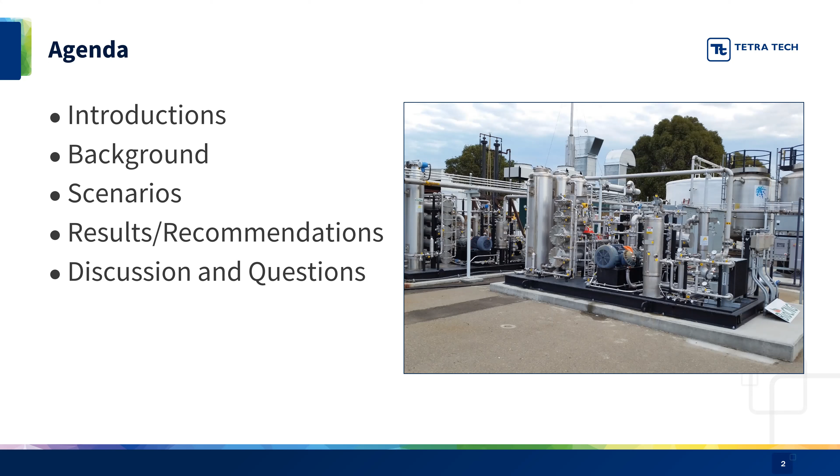We selected several scenarios to analyze. So we'll go through each of those scenarios and kind of a very high overview of the technology and what would be associated with each of those. We have a section on the results and recommendations, which I'm sure is what everyone's excited to see. And then lastly, we'll leave time for discussion and questions.

So for introductions, I'll go first because I'm still talking. My name is Lee Daigle. I'm a client manager with Tetra Tech. And I've heard Cornerstone and Tetra Tech, just so everyone knows. Cornerstone is a subsidiary of Tetra Tech, so we just go by Tetra Tech. So you'll see that all over the place. Mark was one of the original members of Cornerstone. I joined Cornerstone 6 years ago also. I've been in the industry for 20 years. I actually was a project manager for Dane County's RNG facility. And I'm involved in the industry all over the place and teaching classes also.

Mark? So Mark Torzani, I got my career starting in this business over at a place some of you might know, Donohue over in Sheboygan, and worked over there a long time. Started working on landfill gas projects, landfill gas to energy, as an intern. So I've been working on biogas projects through most of my career, and I always liked specializing in, what can we do with this gas? How do we put it to beneficial use?

So I've been involved in that, and that includes 16 years, which is hard to believe, on renewable natural gas and biogas, landfill gas as a vehicle fuel. And one of those things I'm proud of is having a patent on the Bio CNG system and being listed as one of the inventors on that.

So I'm a member of the SWAN Board here in Wisconsin, and I've taught a number of classes through the years. So I'm just thrilled to be part of this here. I'm from Wisconsin, Wausau originally, and always like giving back.

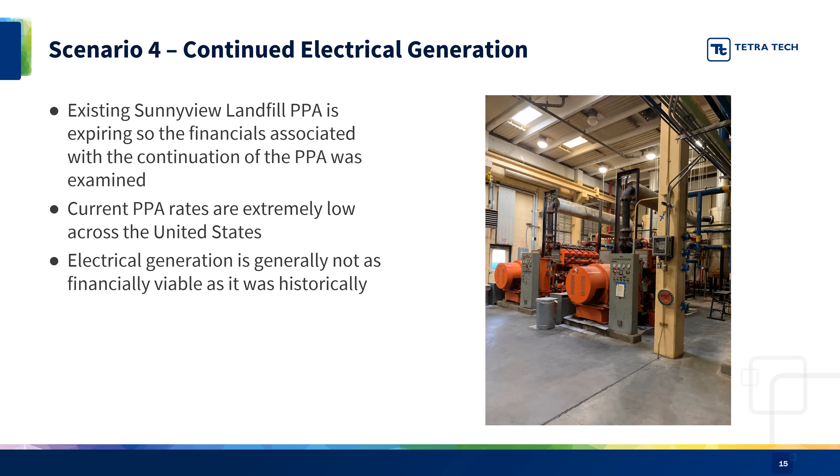Okay. All right, thanks, Mark. So I'm going to run through the results, and then Mark and I will both get into the recommendations after we go through those, and we'll go individually scenario by scenario.

So the first scenario, this is the RNG generation with a direct use, a direct injection. The 10-year net present value of this is $19.6 million with a 3.5-year payback. So the payback is extremely good on this, with an internal rate of return of 27.6. And this is all in the report, by the way. If you have a copy of the report, you don't need to write down these numbers. It's all in the last pages.

But in summary on this direct injection, yes, it has an extremely fast payback period, but it also has the highest capital cost associated with any of the projects at $16.9 million. That does include, I believe, a $4 million interconnection. And that is based on Mark and I, we went through this a few years ago with Dane County. We just did it recently with Marathon County, where we're looking at injection points and what it's going to cost.

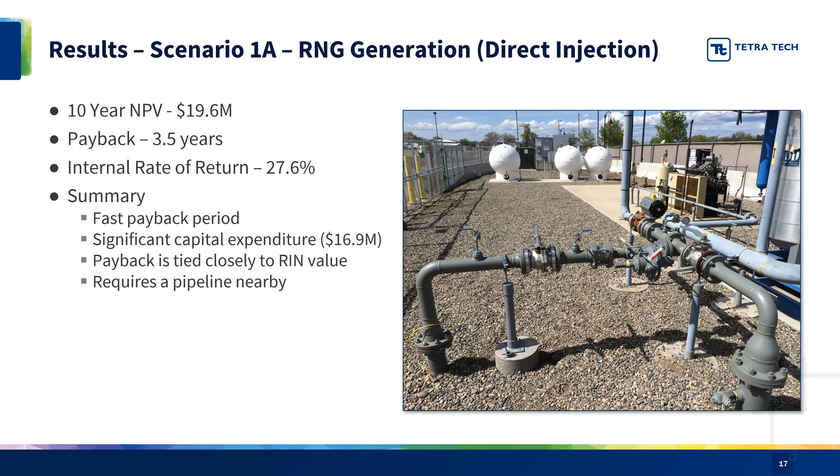This does require a pipeline nearby, but based on a preliminary examination, you do have pipelines sufficiently close, and they should be able to be tied into. But the next step is talking with ANR, talking with TransCanada to really get some of the information about those pipelines. Just because there's a pipeline nearby, it may be at seasonal capacity, and you may not be able to tie into it. So the next step, if this is proceeded with, is to get in contact with TransCanada right away and start talking about the interconnection.

Scenario 1B, which is the RNG generation with a virtual pipeline. Again, it's a lower 10-year net present value with a slightly longer payback period. It is still a fast payback period. I mean, under 5 years for paying back $15 million is outstanding. However, again, this is tied to that RIN market. So if the RIN market fluctuates, you aren't going to get that same return on your investment.

The additional cost that you're going to have on this type of project: first off, the operations goes up quite significantly. It's about $1 million more a year in your operational cost, because now you're hauling the RNG back and forth between your site and an interconnection point. So your operations increases. You also will still potentially, depending on scenario, have a cost for an interconnection and an offload station at another facility.

As of right now, Mark and I are aware of 2 offload stations in the state of Wisconsin. One is Dane County, which was the first in the country actually to do this sort of a system, where they have an offload station on site to accept anybody's gas. The other one that we're aware of is a dairy with digester gas. However, from our information, the dairy is not a public interconnection offload station. It is private, meant only for partners within that dairy. So there is potentially the need to examine another offload station or look at using Dane County's offload station. But we'll get into that when we go into the discussion section of this.

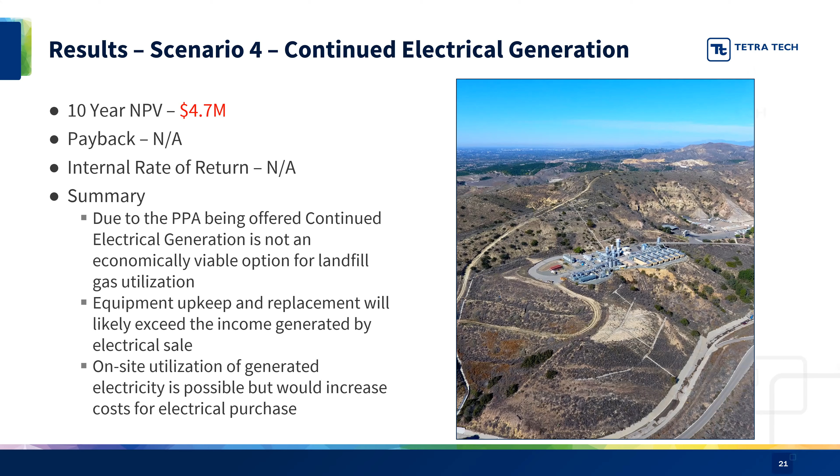So the discussion section, we're going to cover this real fast, but then we want to open this up for questions and really just kind of flesh out the next steps here. But in general, and this is worded in a particular way, Sunnyview has limited potential for a utilization project as you have this declining landfill gas generation rate. And that really hurts a long-term project, which is one of the key factors of the RNG, for example. You don't want declining gas generation because there's so much uncertainty in the RIN market.

In regards to the next step, Mark and I talked about this yesterday. We said, well, the next step is, do you want to proceed forward? You, as the board, need to make the decision if this is something still feasible. I have lots of clients who have closed landfills who are shuttering their landfill gas electrical projects down and flaring the gas because the payback isn't there. You can save costs, you can have avoided maintenance, you can save yourself a lot of headache with just shutting down the plants.

That is a realistic option here if the county decides to go that way. But if you say, no, we want to be green, we want to proceed with some sort of a utilization project, then it really is updating that economic pro forma based on that most recent PPA and really refining that electrical generation site information. You have one engine that needs this much work on it. You have another one that needs this much.

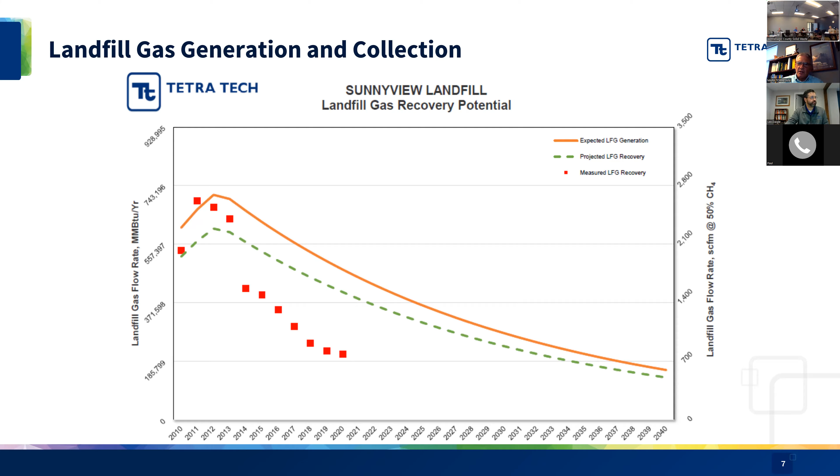Lee, can you go to the slide that had the RNG direct injection option with the chart on the right? It'll explain one thing on a closed landfill that's not active. This one? Yes. So we do work on wastewater treatment digesters, ag digesters, food digesters, and landfills. Landfills are the most difficult to put an RNG processing system on, and I'll tell you why. So we take our biogas source and we go through a pre-treatment. We're pressurizing it. We're taking out some moisture. There may be some VOC removal in there, but then we'll go to the CO2 removal, CH4 enrichment.

If we're working on a digester, a wastewater treatment plant, we're done there. Then we go right off to our off-gas control pipeline. In a landfill, we have a fair amount of nitrogen and oxygen that comes in because we're under a vacuum and we're drawing the gas in. On a digester that's under positive pressure, it's not uncommon for us to see methane in 60 to 65%, where I'm guessing on your landfill, you're somewhere in that 50%, John. Right. Yeah, and that's not uncommon.

A big cost in treating landfill gas is this nitrogen removal and the oxygen removal, which adds to your O&M, which makes it more difficult. And when you would say, hey, we got 700 CFM, 800 CFM on a closed site, it's not going to be high on a developer's priority list because they're going to spend their money on more active sites. It's not that it can't be done, but they're certainly looking for the largest return on their money. And that's where developers are going to go.

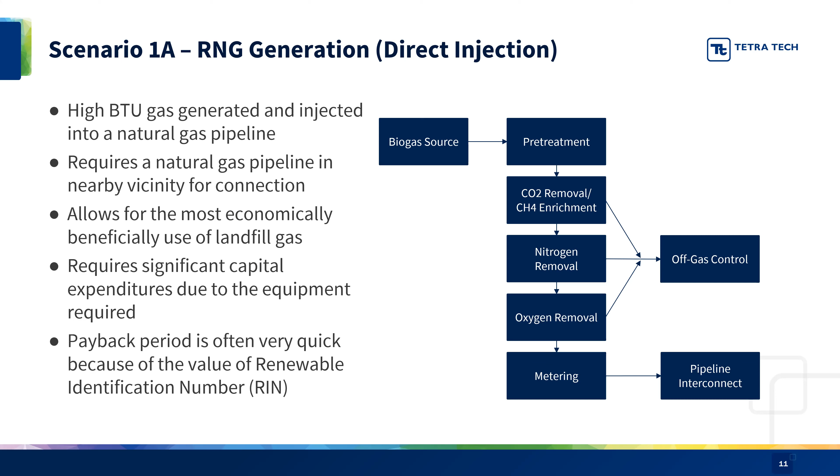The question would be how much. No, you're the chairman, you go first. Thank you. How much does it cost to convert those diesel vehicles to this type of fuel?

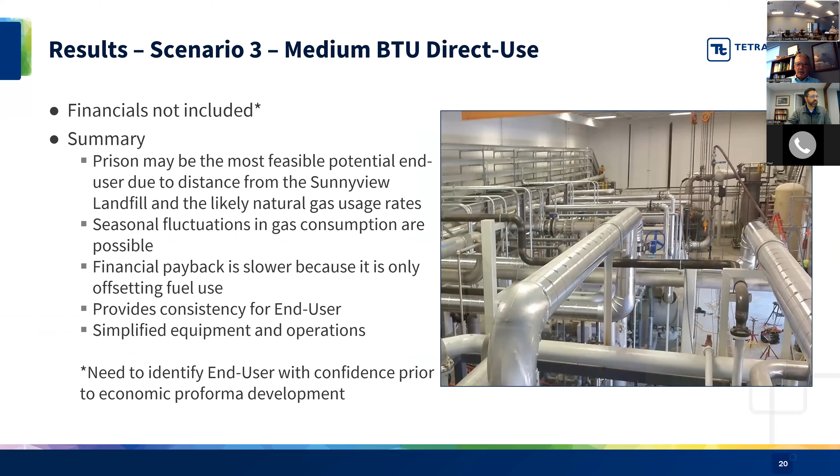We'll tell you what's going on in the market. Early on, we were seeing some conversions, and the large companies, Waste Management, Advanced, GFL, Republic, were looking at converting. Typically right now, because vehicles get replaced every 5 to 10 years, they're just buying new vehicles. And I think at that time, converting vehicles was going to be somewhere in that $50,000 range for a large engine. A large part of that is actually those compressed natural gas storage tanks.

So we're really not seeing gasoline or diesel engines being converted anymore. I think that market has fallen by the wayside and it's just strictly new vehicles. They're going to perform much better. And as I said, enough people have been doing this now for 5 to 10 years. They're just moving their vehicles around to make sure CNG vehicles are where they put their stations.

Back in the 70s, I was in the valley. I had an LP-driven Ford pickup truck, one of the first ones around. The thing ran extremely efficiently.

You never had to worry about changing the oil. Yeah, that's what I said, lower maintenance. And we had a dual fuel vehicle when we started in this. I think it was a Ford F-250, could run on gasoline or renewable natural gas. And we did do some dynamometer testing on emissions and power.

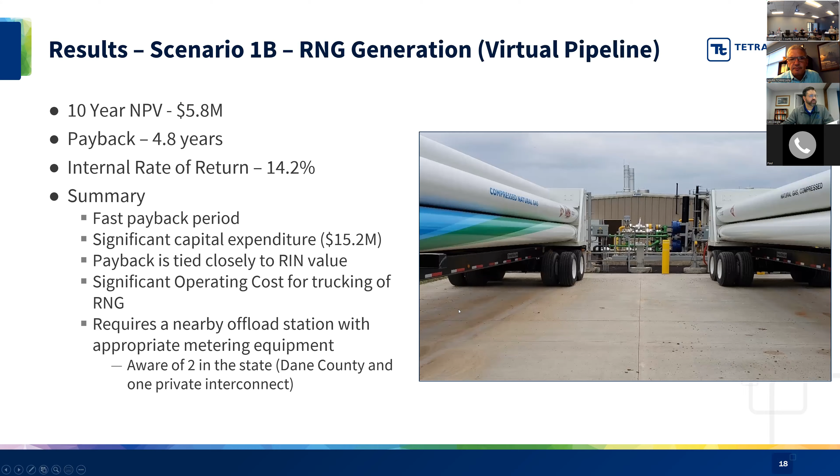And actually, Mark, I was just looking to see, yeah, so this is essentially what we're talking about here. It's a small slipstream of gas coming into a Bio CNG, which is just generating vehicle fuel. So it's this size. In the back here, you have your storage vessels, the horizontal ones. That's storing your compressed natural gas. This is your membrane, hydrogen sulfide treatment, the tank up front. That's a 200 CFM system, and that is the one I believe at Randolph Farms.

Yep. And actually, that concrete pad you see in the front there, right in the lower right corner, that was phase 1. We put concrete in there for phase 2 right away. Yep. You know, they were being proactive.

So, and this is true. Don't tell John, but that was right after the fire inspector left and said, here's what you have to do to use this. Some sort of sign or something was supposed to be on there. So we did it. A guy by the name of Mike DiMaggio was out there trying to do burnouts with the wheels. He got in the truck.

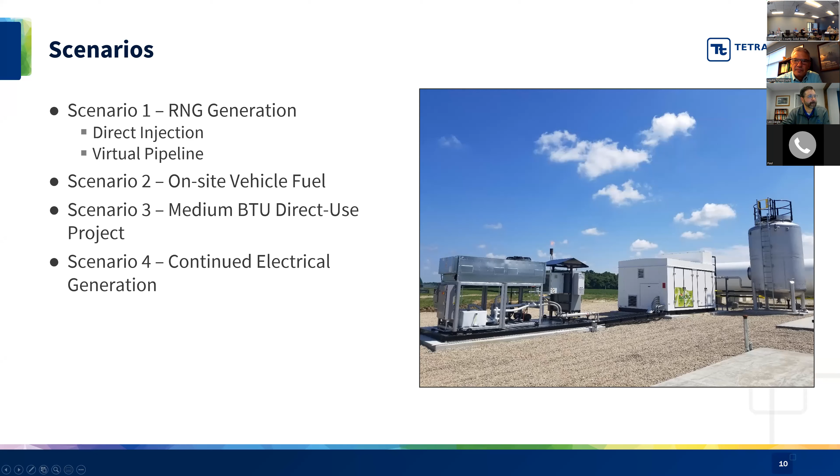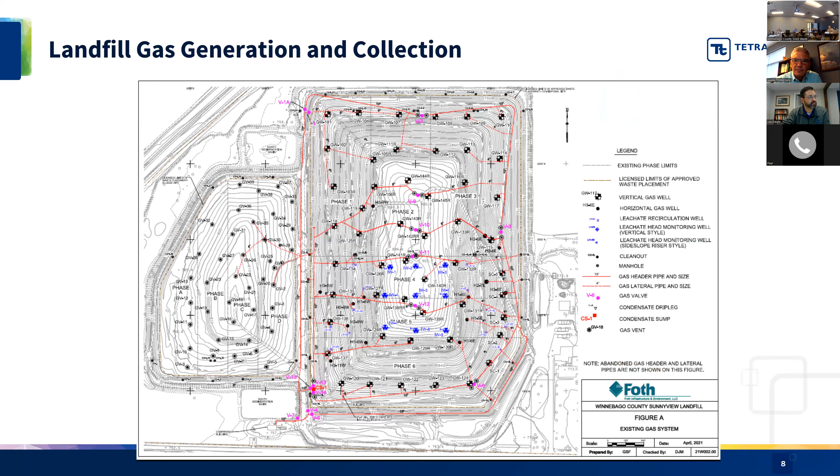Go ahead. You mentioned storing the compressed natural gas. Right now, the way I understand it, the hill produces X amount of gas. If we don't use it, it's flared off. How much can you store? I mean, on Saturdays and Sundays when none of the fleets are running, do we end up having to burn off the gas, or can a certain amount be stored?

We'll fill that with gas to about 250 PSI. It's a less expensive form of storage when we wanted to have some for weekends. The tanks that you see on the tube trailer and in the back are somewhere around 3,500 to 4,000 PSI. So if you're not using that fuel, and all of these systems are automated, once these are filled, essentially the gas then has to go to the flare because it has to go somewhere. You're not storing it in the landfill and we can't produce anymore.

So we try and size these systems so we've always got some sort of storage. It's a fine line between how much storage you need. It's expensive, and what's this trade-off with availability. There does get to be some usage of how many vehicles can fill at once, depending upon your flow rate. If you wanted to have the whole fleet come up and fill at once, you're going to need an awful lot of storage. That is something that is considered.

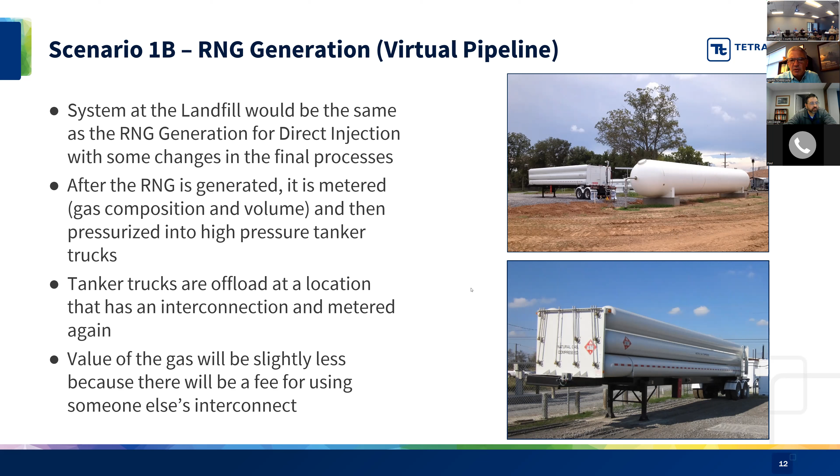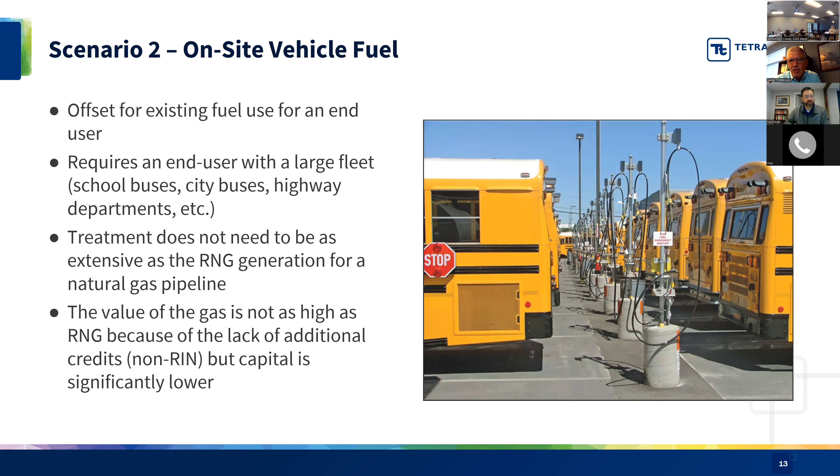In the projects we've done with a lot of vehicles, there is some staggered. I think you had the one, those are slow fill posts where essentially that's just an overnight fill. They're called time fill. They're slow. Yep, the buses just park up to it, they fill overnight. The other style is like your regular gas pump. That was the other picture you had right there. That's a fast fill. You drive up to it. They have both at this site in Indiana, so trucks can pull up and fill up. But then they also have their fleet of vehicles that come in at night and park there. So that gets into some of the logistics with a fleet on what's actually viable.

So hey, I'm going to have to apologize here. I've got to jump off onto another call that I really need to be on. I can stick around still and answer any more questions. If you can do that, Lee, that would help out.

And more than anything, working with Lee here, as you're in your infancy of, hey, can we do something with this? I think the answer is certainly, but some of it's an appetite for how much capital is there and how much risk.

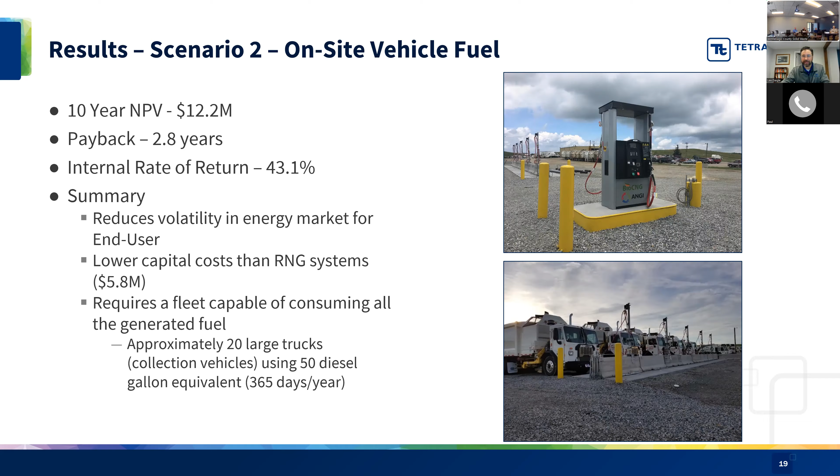Yeah, I'm more confused. Am I unmuted? Yes. Can you hear me? Yep, we can. Okay. May I, Mr. Chairman, may I say a couple words? Whatever you say, Paul, go ahead.

Thank you. Okay. From my perspective, I would like to see a matrix table of options that gives the maximum benefits of the four options with the minimum risk and expense. I've been following the various options.

Of course, sitting here behind an army of trailer trucks going at 75 miles an hour with 40 to 60 mile an hour gusts of wind, it's difficult for me, and of course, I'm not the engineer. I'm not the scientist. But from my layman's perspective, I would like to see a matrix of these four options, their maximum benefit and their minimum risk and expense.